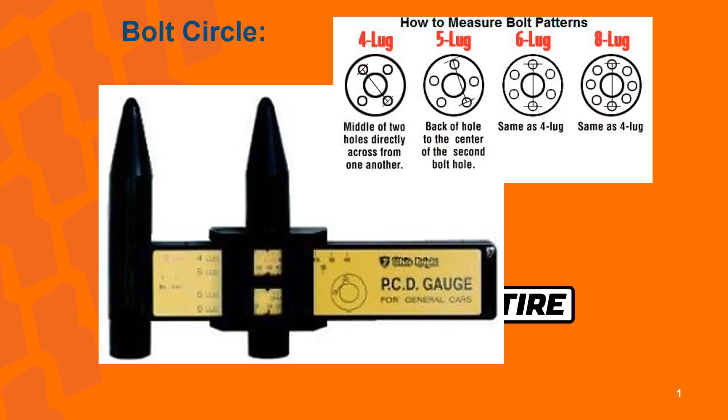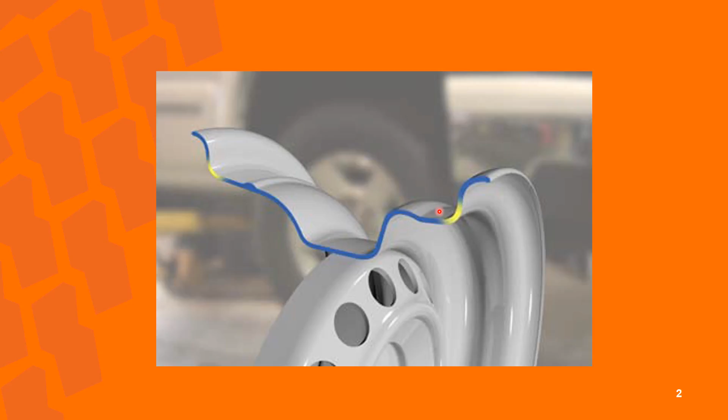measured for the lug nut holes on your vehicle, and we use a measuring tool here, and we just put it in the holes and it tells us what the bolt pattern is. Here's a wheel, and this is a cutout of a wheel, and you can see here that the bead of the wheel would sit up against here and it snaps over under air pressure, and even if the tire is running a bit low, it can't go back here. And so this is the width here. You'd measure from this flange to this flange.

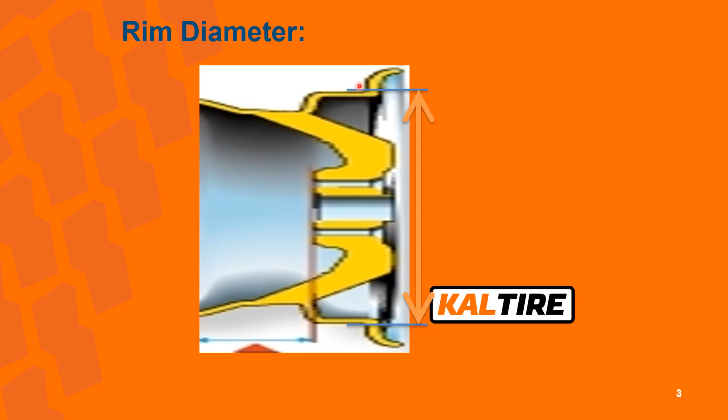Here's another picture of wheel diameter, and so if you measured from the bead seat area, the flange here down to here, it would give you a certain amount of inches. This could be 17 inches, and any 17-inch tire would mount on this 17-inch wheel. This slide shows the midpoint of the wheel and where it would bolt onto your vehicle. It either bolts on positive here or negative here, which pushes the wheel out or in. So on a truck, it might be mounted back here, so all the wheel is out front.

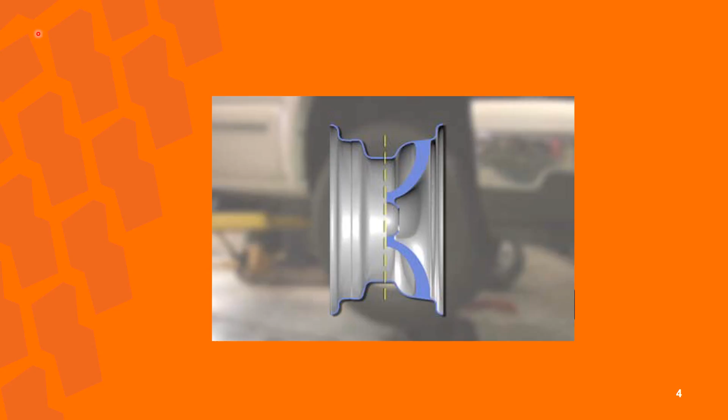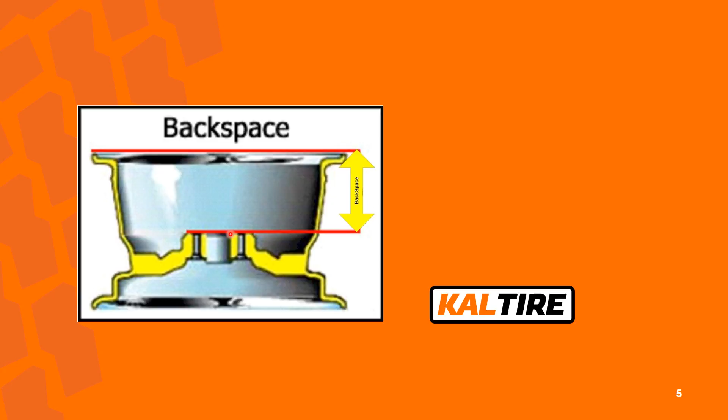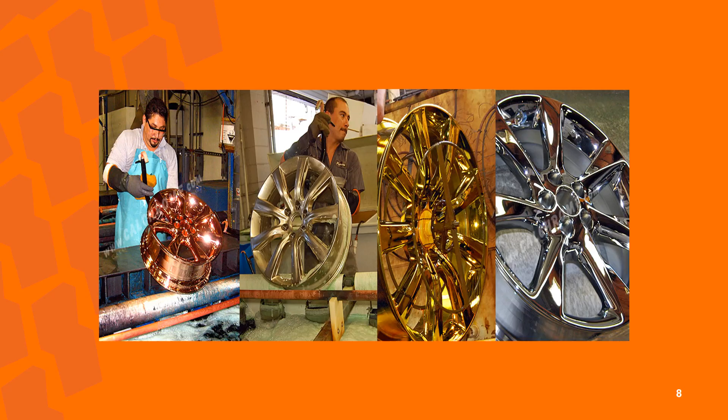This picture shows a custom wheel and just the different finishes. I'm going to go through some different wheels for finishes. This is a polished aluminum wheel that shines up really nice and looks like a mirror, but you do have to repolish that as it will tarnish with salt and water and age, so that's time consuming, but it looks nice. This is a chroming process where the wheel is dipped in a solution about 13 to 14 different times, and that solution is left to dry, and it produces a chrome finish, and it looks like a mirror. It's a wonderful finish. It gets expensive, that one.